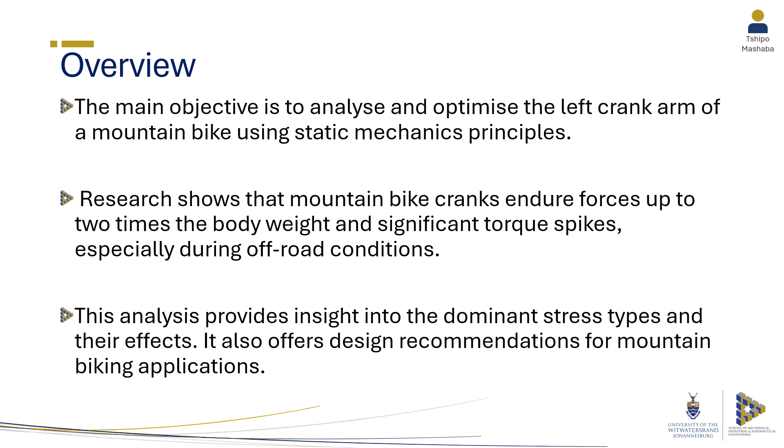Let's start with the key assumptions. Geometry: a 175mm long crank arm with 25mm diameter, a peak pedal force of 710 newtons. Material: aluminum alloy. Under these conditions, we analyze 4 stress types: axial stress, bending stress, torsional stress, transverse stress. Our results show that bending stress dominates at critical angles like 90 degrees with a maximum von Mises stress of 440 MPa.

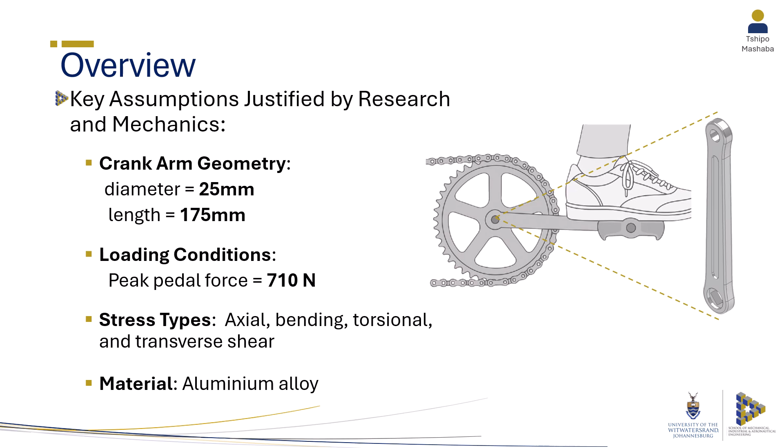Hello, my name is Avhatakali Nkhwatshirema and I'm going to present sections under loading scenarios, stress analysis, and combined stress evaluation. Under our loading scenarios, we have our free body diagrams representing our crank arm at different angles and our force applied at different angles. And for our presentation, we're going to use the free body diagrams at 0 degrees.

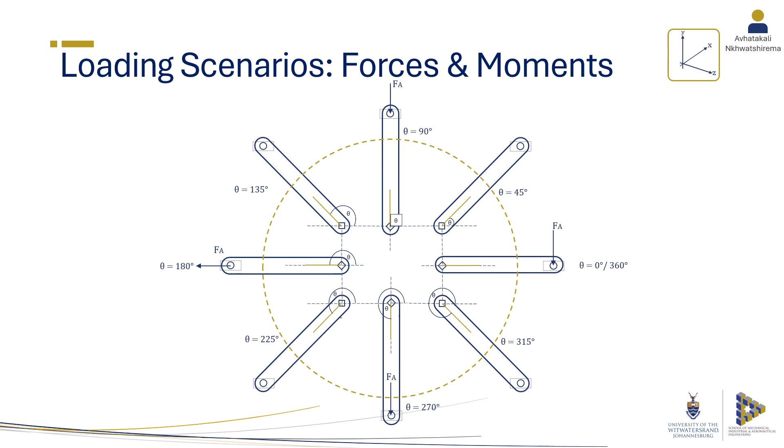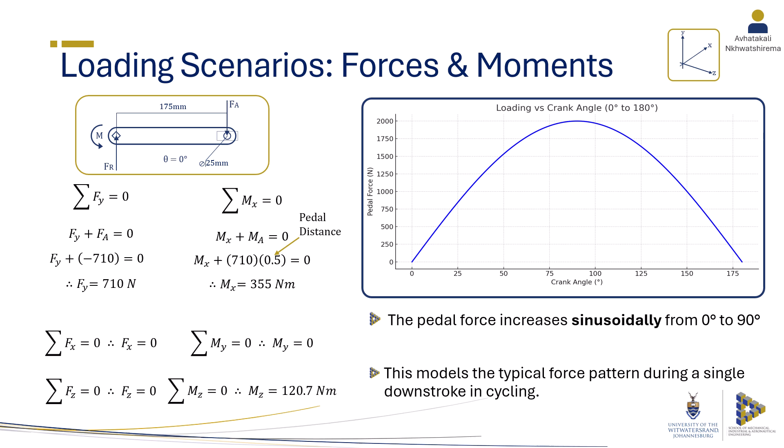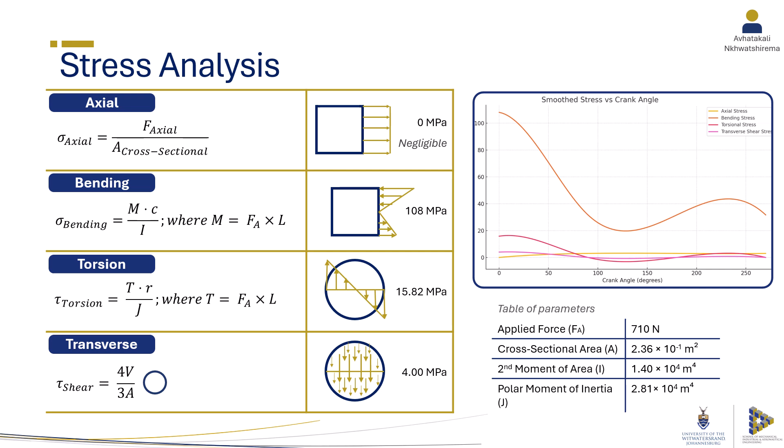And going to our next section, which is stress analysis, we have analyzed 4 stresses: our axial caused by the normal force, bending caused by the bending moment, torsion shear caused by the torsion, and the transverse shear caused by our shear force. And the graph on the right represents all the stresses at different angles. And our next section, combined stress evaluations, shows our superposition of normal stresses and shear stresses. The graph on the right shows that our normal stresses are the dominant stresses throughout all the angles that we have analyzed.

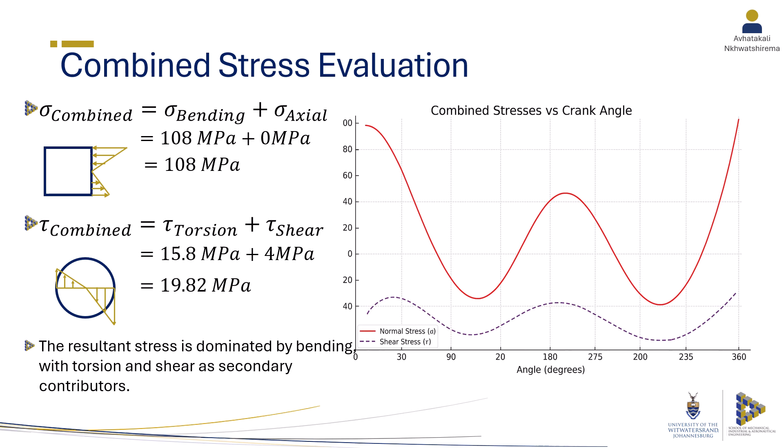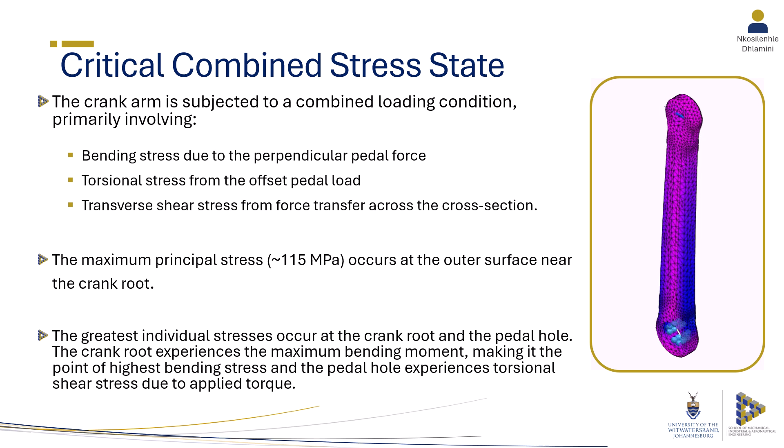Good day. My name is Nkosilenhle Dlamini, and I'll be taking you through the critical combined stress state and the stress distribution across the cross-section. The analysis reveals that the crank arm is subjected to a combined loading condition primarily involving bending stress, torsional stress, and transverse shear. Upon calculation, we discovered that the principal stress is approximately 115 megapascals, and it occurs at the outer surface near the crank root. This is also revealed by a simulation we conducted.

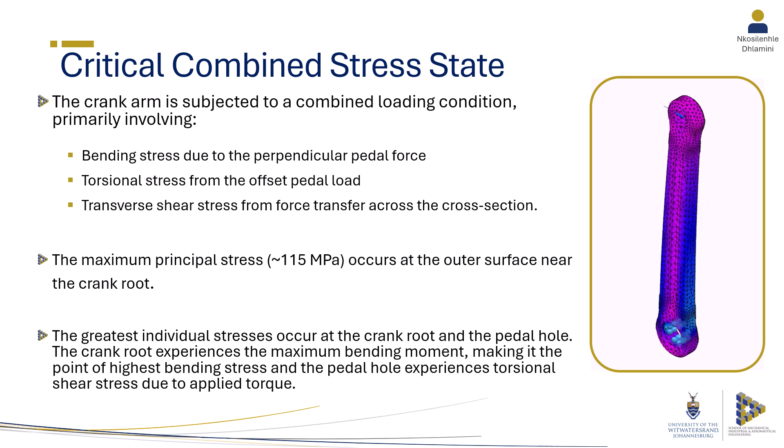The greatest individual stresses occur at the crank root and the pedal hole. The crank root experiences the maximum bending moment, making it the point of highest bending stress, while the pedal hole experiences torsional shear stress due to the applied torque. At the critical location near the pedal holes, the crank arm experiences peak stress at the outer surface due to the combined bending and torsion.

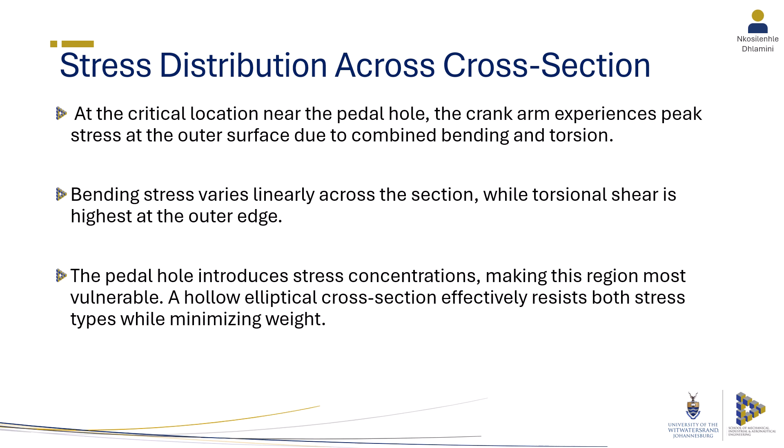Bending stress varies linearly across the section, while torsional shear is highest at the outer edge. The pedal hole introduces stress concentrations, making this region most vulnerable. Therefore, a hollow elliptical cross-section effectively resists both types of stress while minimizing the weight. We made use of a plane stress element and a volume stress element to further visualize these findings.

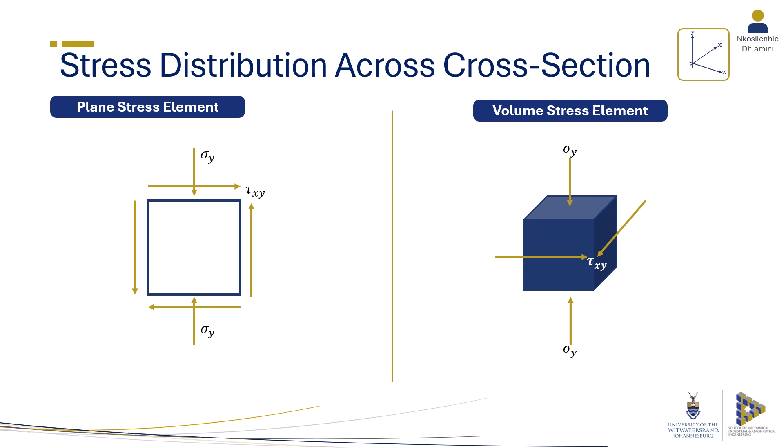Good morning, my name is Kanyanga Mukonda. Design recommendation and material selection. Based on our stress analysis, we recommend a hollow elliptical cross-section with a major axis oriented vertically. This shape increases the second moment of area in the direction of bending, significantly improving the resistance to bending stress without adding unnecessary weight. Because it is a closed shape, it also maintains a strong torsional stiffness, and its smooth curves reduce the stress concentration that typically leads to fatigue failure.

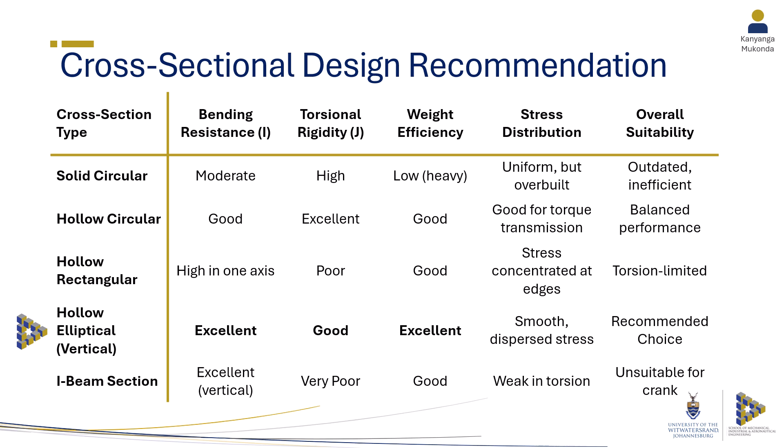For the material, we recommend aluminium. It offers a high yield strength of approximately 500 megapascals, a good fatigue resistance, while also being lightweight and cost efficient. Compared to steel, which is heavier, and titanium, which is more expensive, aluminium provides the best balance between strength, weight, and manufacturability. However, due to aluminium's low stiffness, we compensate by increasing the moment of inertia, which is easily achieved using the elliptical cross-section. This combination mirrors what is used in many high-performance crank arms and ensures safety, reliability, and efficient design for mountain bike application.

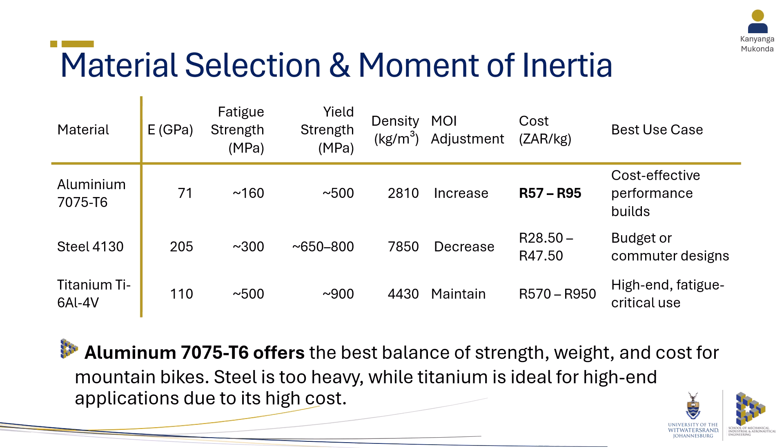In conclusion, my group members and I identified bending stress at 90 degrees under the 710 newton pedal load as the most critical case. By adopting a hollow elliptical cross-section and adding smooth fillets at concentration points, we increased the section modulus without extra mass, significantly improving the fatigue resistance. Moving forward, we will integrate dynamic loading cycles and detailed fatigue life analysis to fully validate and refine those design enhancements.